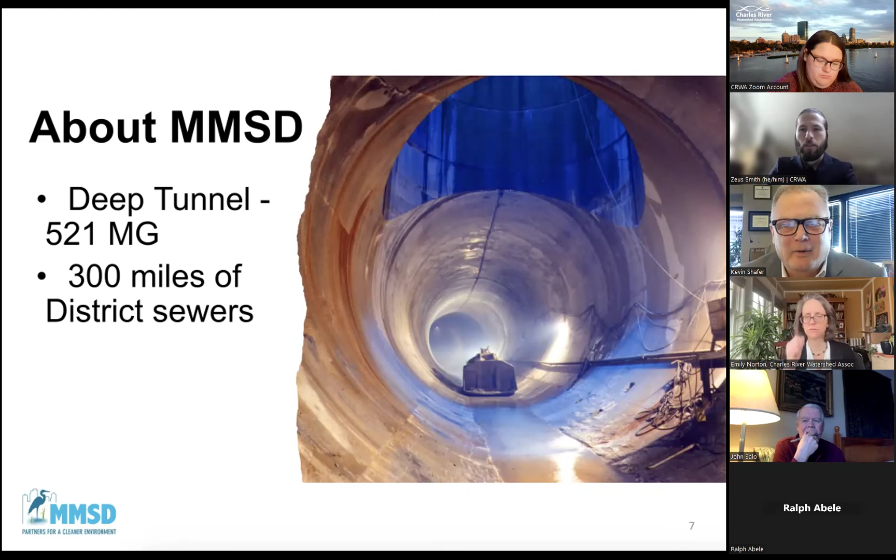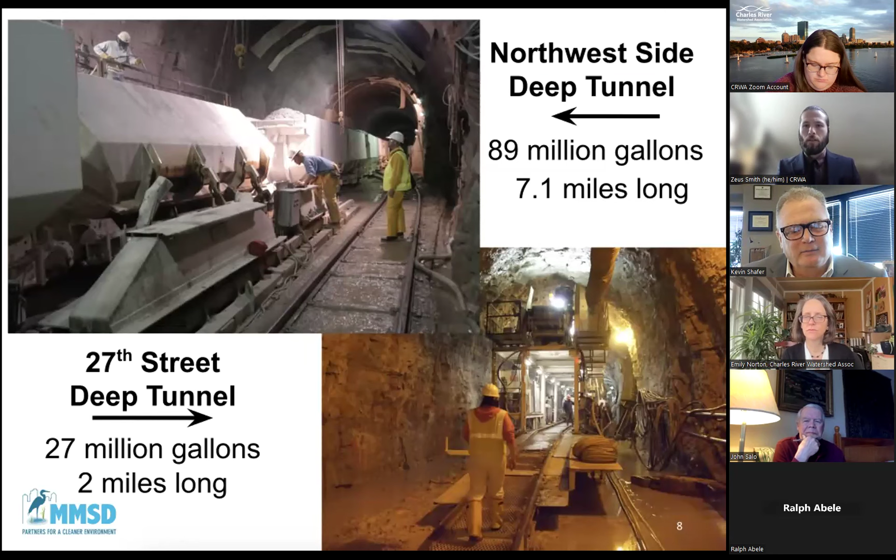Next slide. We've added 2 tunnels since I've been here. That's part of that 521. We put in the Northwest Side Tunnel, which was 89 million gallons, and 27th Street Tunnel, which is 27 million. And I show these pictures because this is not easy construction. This takes a long time to design, to construct, and safety of the workers and the public is high on the charts when we're trying to do this work. Next slide.

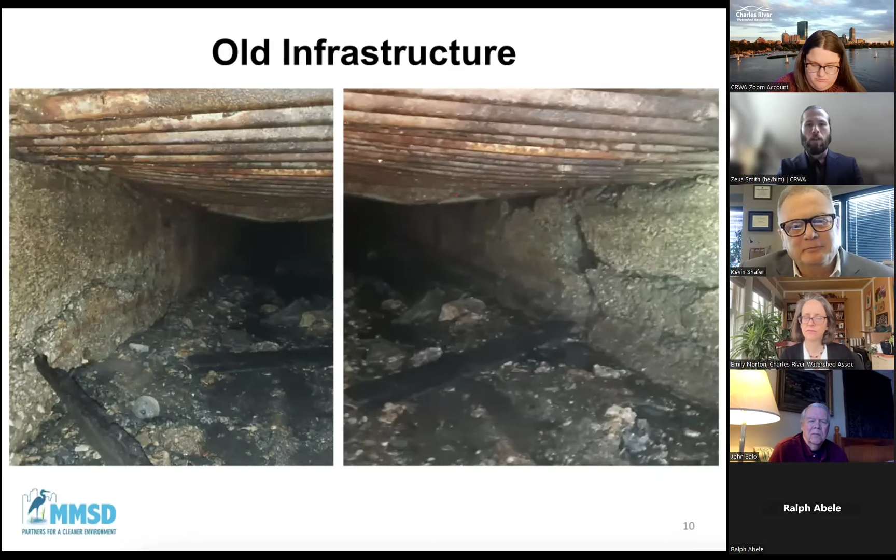And like Boston and everywhere else, we have infrastructure that's very old. This is a current project that we have. That pipe is still operational today. You would think it's going to fall in on itself, but luckily it has not. So we're in an emergency repair to the sewer to put a new pipe to replace this one. Next slide. I think I saw a chat question pop up.

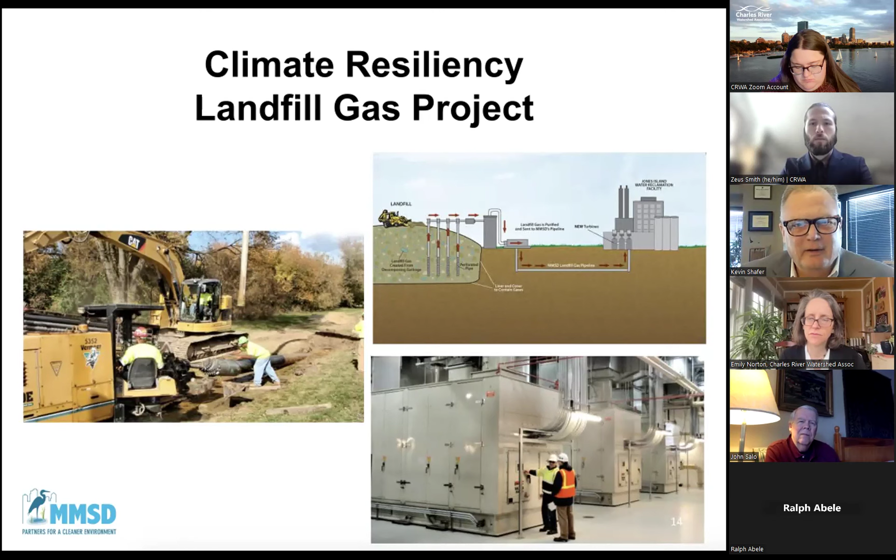Just a couple slides on the climate resilience energy side. We built a landfill gas pipeline in 2012. It went online in 2014. And so now when it's not raining, when we're not running the deep tunnel pumps, our Jones Island plant will run off of landfill gas as opposed to natural gas or coal produced electricity. So it's been a great project for us, and it's one of the big steps that we're using to get to that 80% self-produced goal. Next slide.

So when we look at the left side of the brain on that vision, it really is looking at a watershed approach. On this map, you can see the red line. That is my sewer service area. And as I said before, it changes constantly. But we're at the downstream end of the Milwaukee River watershed. We have the Milwaukee, which is the orange-yellow watershed.

The green is the Menomonee River watershed. The purple is the Kinnickinnic. The blue at the bottom is Oak Creek. And then the gray is Root River. So we're at the tail end or downstream end of the Milwaukee River. The Milwaukee River runs right through downtown Milwaukee, and we're the headwaters for the Root.

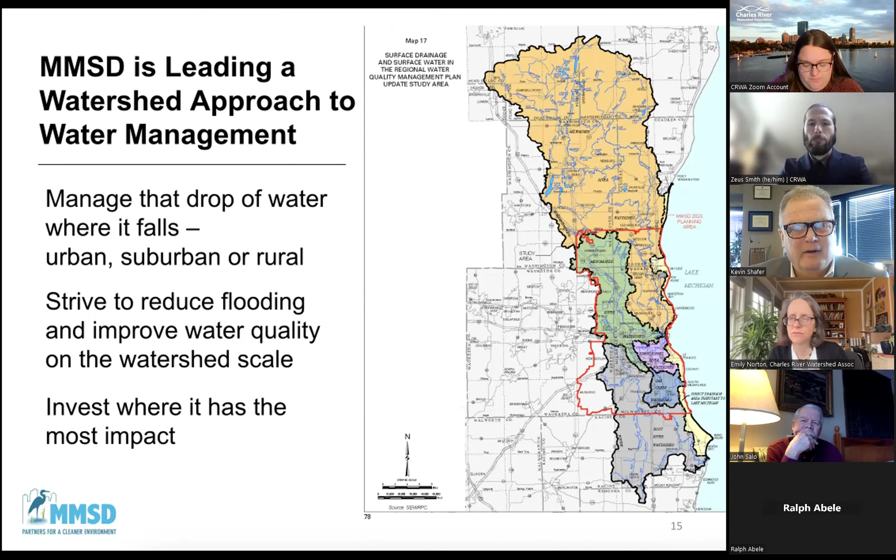So what we've really tried to do is to adopt an approach where we're managing water where it falls. And that's in the urban, suburban, and rural areas, which means we're working with farmers, we're working with communities in the urban setting, trying to manage stormwater so that it does not become floodwater, and trying to manage stormwater so that there's less pollutants running off into the waterways and keep that stormwater out of the combined sewer system as well. And we're looking to try to invest our dollars where it has the most impact. Next slide.

Same issue here. This is Hart Park. This is in Wauwatosa, one of the suburban areas, and this had about 75 homes on it. One of my first public meetings in 1998 was for this project, and at that time, people were flooding significantly throughout the area. We went in and purchased those homes. We lowered what we call lowered the floodplain.

So we lowered the area in the floodplain, and State Street, that road that you see across the top of that park area, is really just a raised area that is now a levee that people don't even know is a levee, to protect the homes and the businesses on the other side of that road, but allows this area to flood when it happens to get those large storms. We went in and we took out a lot of concrete lining, naturalized it as much as we could, and this picture on the bottom shows that waterway. Next slide.

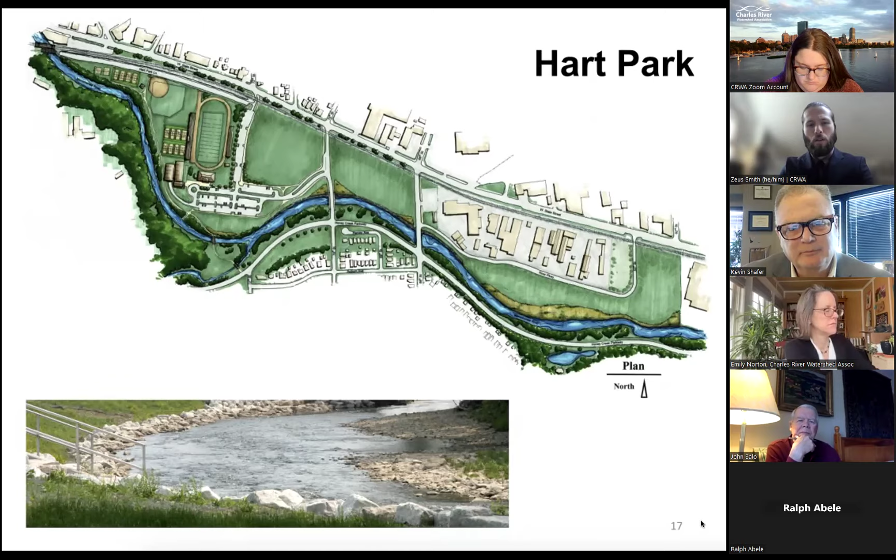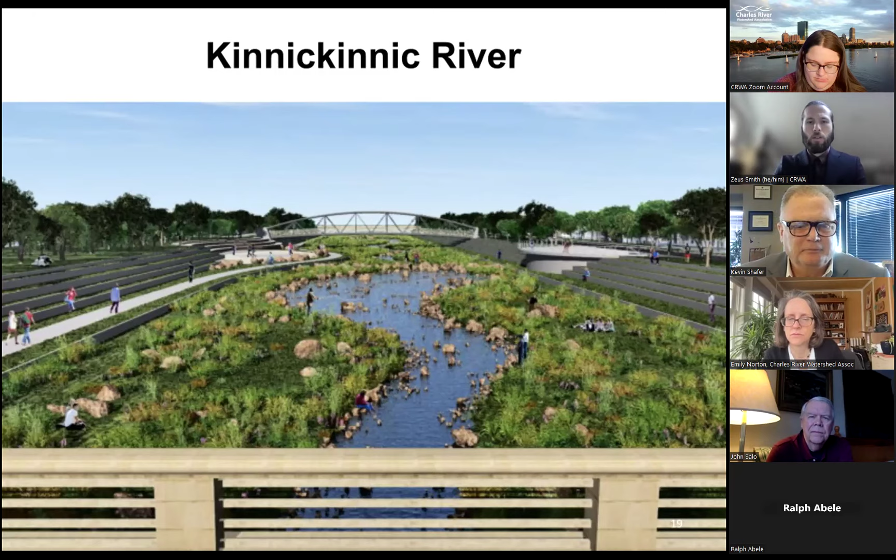But this is a 100-year flood protection project that returned to nature with the work that we did. And we're seeing fish spawning up through the waterway now that we didn't see before. Next slide.

So I'm kind of taking you through an evolution of how we started some of this stuff 25 years ago, which was building off the deep tunnel system, really manage those CSOs as much as we can. And as you were talking about earlier, Zeus, you said you've got the low-hanging fruit. Now you're really trying to get the next step. We were in that same place. And so we really relied on and improved the operation of the deep tunnel system to reduce CSOs.

Then we went into that flood management work that I just showed you pictures of, because if you can keep the water in the creek, it's not getting into people's basements, which then go into the floor drains, which are then connected to the sewer system, which then help us reduce overflows if we can keep that water out of those basements. Plus, it keeps the water out of people's basements. So we're kind of working upstream from the tunnel to the flood management projects.

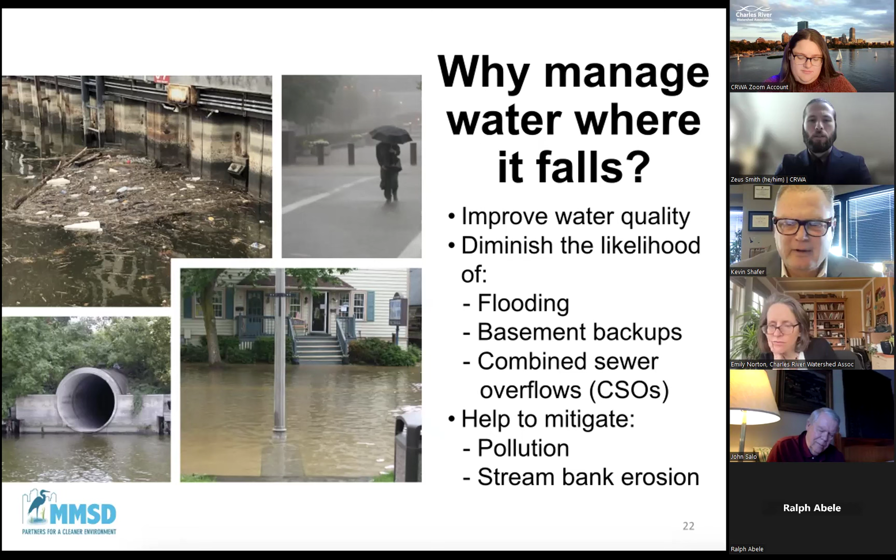So here's just some of the pictures. You know, flooding on the bottom right, that's probably around 2009, 2010. We get heavy rainstorms, trying to minimize flooding, basement backups, and CSOs. And also, I've not talked about it, but stream bank erosion as well. Next slide.

So we've got several programs that I'm going to go through that we have implemented and are implementing. We fund this every year through our capital improvement budget, our CIP, but we're trying to reduce the amount of wastewater that we have to clean, because if it's stormwater and we can allow it to be cleaned naturally and run off to the rivers, then we don't have to pass it through our wastewater treatment plants. We're trying to keep clear water out of the system.

We've got a private property inflow and infiltration program, which I don't have in this presentation, but working to reduce the inflow and infiltration that's coming into the laterals from the house to the street. That's about $5 million a year that we fund there. We have been in compliance with our permit practically since I've been here. In 25 years, I think we've only had 2 permit violations, and they were all garnered all this work towards the 2035 vision.

This picture is a suburbs of Fox Point, and this was a new development, and they came to us and we funded this green infrastructure around the facility to reduce the runoff and the impacts of this development. Next slide.

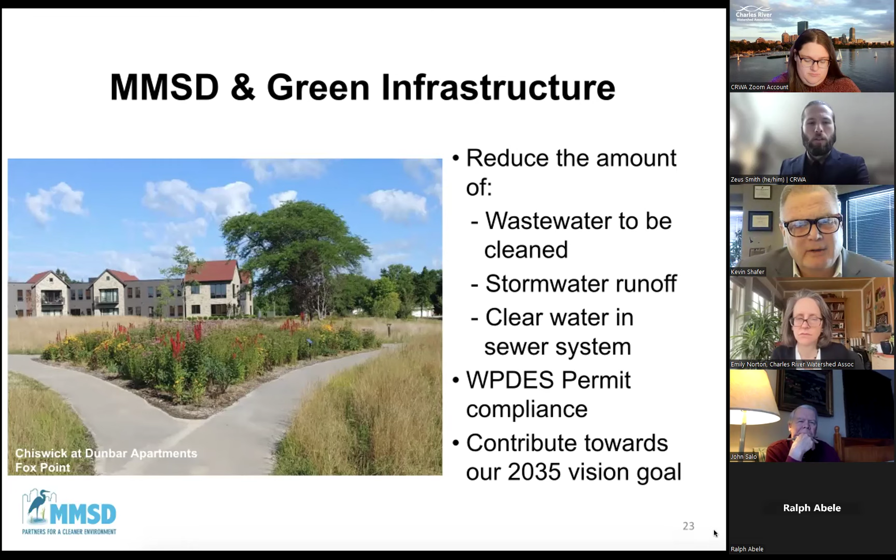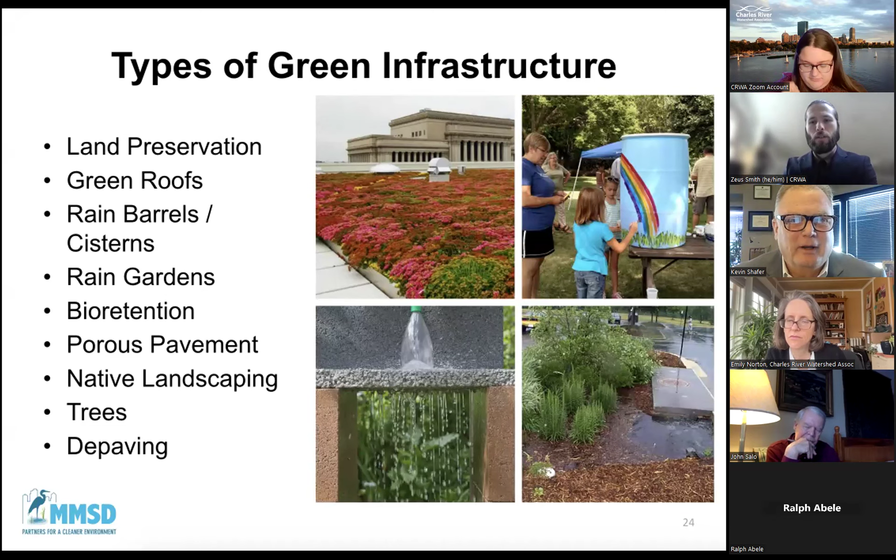We have different types of green infrastructure that we pay for: rain gardens, rain barrels, green roofs, bioswales, trees, depaving parking lots, and so forth. One of the most fulfilling projects we have is our Green Schools program, where we are taking asphalt that's not used very much. It was built mostly to lower maintenance, replacing that asphalt with natural areas for the students to play and learn in. And it's just really fulfilling to see a classroom of kids out there playing in an area that's also a stormwater management facility. Next slide.

Here's kind of the timeline. Like I said, I started in 1998, head of engineering. 2002, I became executive director. So we just started the Greenseams program, which I'll talk about in a minute. Then we came along with a best management practice partnership program. Then went to the regional green roof program, what we call the GIP, the Green Infrastructure Partnership Program, GIPP.

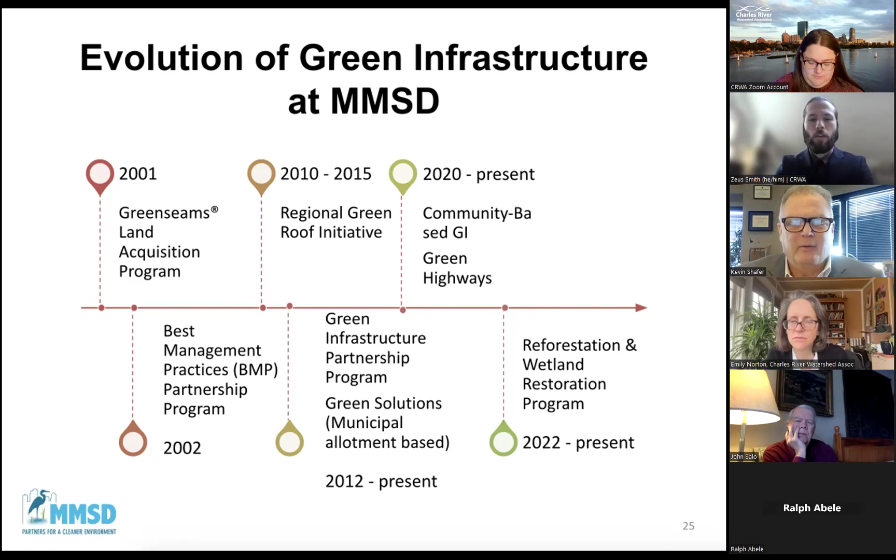And all of these projects or programs are still going now, up till most recently in 2022. When President Biden came in, I could see a strong emphasis coming on climate change. So we started a reforestation and wetland program, which I'll talk about in a minute. Next slide.

So this is the GIPP, the Green Infrastructure Partnership Program. This is basically a competitive grant program where we pay up to 50% of the green infrastructure cost. We try to keep those costs at about $1.95 per gallon. This can be on public or private land. We're really looking for developers and champions, people to really take this and move it forward on their own.

And once we get done, we put a conservation easement on that land, because we need to have some form of asset to show that the investment that we made with public dollars has an asset that's associated with it. Next slide.

We also do the Green Solutions program. This is a reimbursement program for the municipalities. When we started green infrastructure in 2001, 2002, the biggest naysayers were the city engineers, because there was no way to document a for sure improvement to water quality. And that was because we were only looking at stormwater management. We weren't looking at all the other benefits that are brought with it.

So we started a program where we reimbursed the municipalities to put green infrastructure into road projects, into redevelopments that they're managing. We put a 10-year easement on that. Minimum projects are $25,000. If they don't spend the money in 2 years, we roll that over as a $300,000 cap that we then distribute to other communities. So it really gives the municipality an incentive to use the funding as we bring it out.

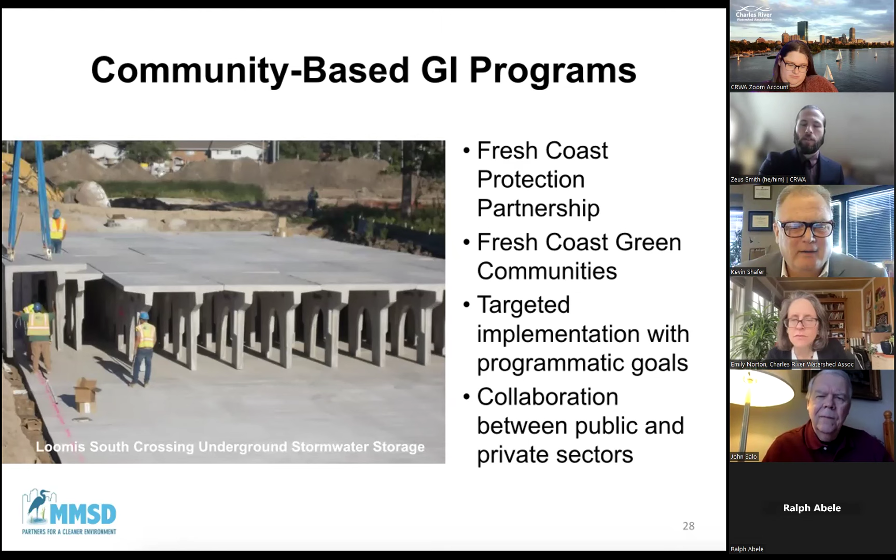The benefit of the public-private partnership is the nimble approach that they can take with moving these projects forward. Plus, we do not pay a dime on these projects until they're fully operational and they can prove that the number of gallons that they said they were going to get from the project actually materializes. So we do not have payments on these projects until the very end, which my CFO likes. It's a good cash flow for us and we can see it coming. But it really provides the incentive for them to get the projects done and to meet the specs that we had started with. Next slide.

This project started several years ago. This is a green highway project. I actually got this from Atlanta. So I went to some conference that we were at and was talking to someone and we were looking out at this interstate that had all these overpasses. And I said, well, that's a great collection system for water because they're sending it down these downspouts off the interstate and just going into the paved area and the combined sewer system.

So what we did was we partnered with the city of Milwaukee, Milwaukee County, and especially the DOT, the Department of Transportation for the state, has been a great partner on this. And we design, construct, and manage these projects to take the water off those overpasses and put them into a natural setting. This picture is the Marquette overpass. And after we built it, the State Department of Natural Resources actually moved their offices across the street, which is a nice synergy because they help us maintain this once it's built.

And we're on our third overpass now. We just approved the third one last month. So we're systematically going into some of these overpass areas in the urban area and trying to naturalize the setting underneath. Next slide.

This is the Greenseams program. So this is really up in the upper areas of the watershed on that map that I showed you. Again, looking at the watershed approach as a whole. This project was started when I was head of engineering in 2001. And what we thought was, with our flood management, we're always kind of the hamster in the wheel. We're always chasing the water and never getting ahead of it. And that's because as soon as we built a flood management facility, someone would put a development upstream that would send more water down to that facility.

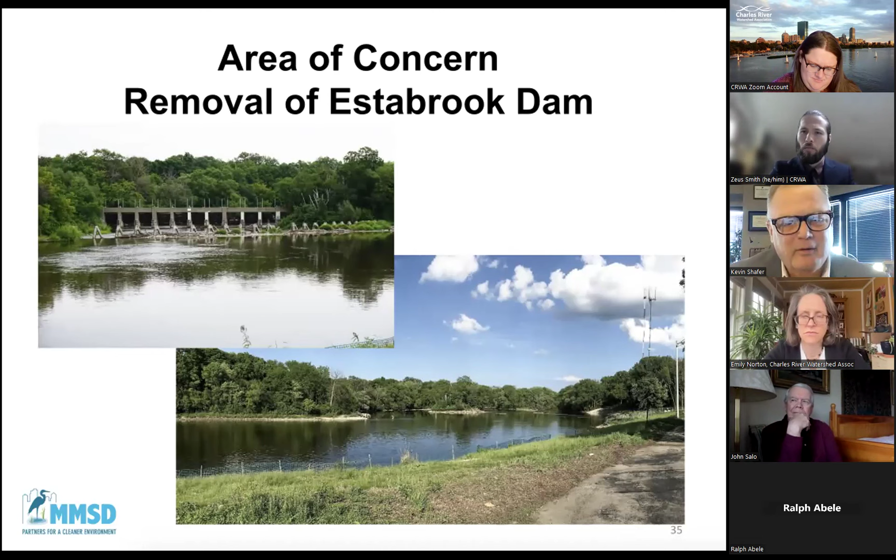The county sold us the dam for $1, and we tore the dam out. This is just after deconstruction of the dam, the bottom right picture. We removed the dam, restored the waterway to its natural setting, reduced the flooding impacts upstream that dam was causing, and ended up recouping all of our funding through both state and federal programs. So it's been a win-win for the community. Next slide.

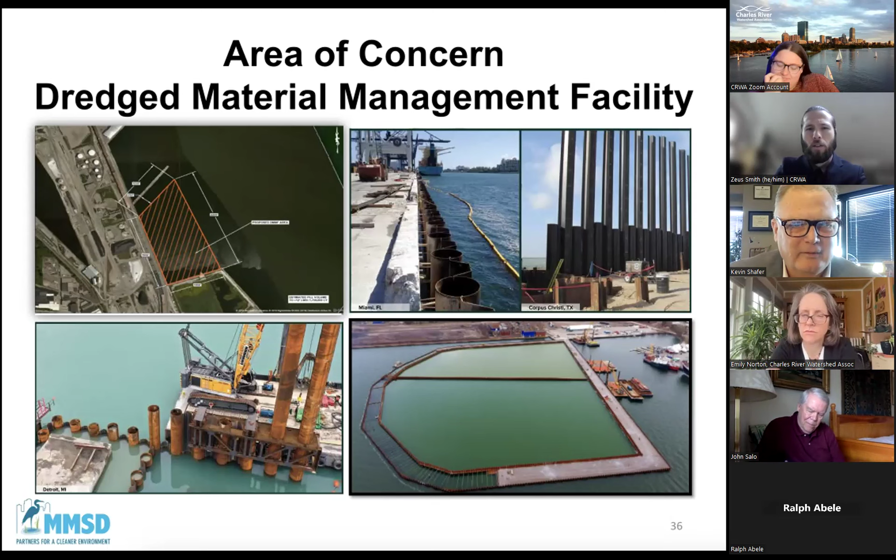But this just shows that as we've kind of matured as a sewer district and as a region, we've gone from CSOs to flood management to green infrastructure, and now they're asking us to take part in projects that weren't originally in our jurisdiction. So we had to get some help from the state legislature to change our jurisdictional limits. Next slide.

This is the Kletzsch Dam Fish Passage that we built last year, went online in December of 2023. And this is another area of concern project where EPA paid us to do the work. We actually built a fish passage around a low head dam that was in the area that the community wanted to keep. So this is now operational, and one of those where we kind of stepped out again and did more than what we have in our jurisdictional limits. Next slide.

A lot of community involvement. We've captured the One Water, Our Water theme. We go out to communities and talk about what they can do, individuals, neighborhoods, what they can do to reduce the runoff or the use of water in their homes. A lot of it is really starting to be more towards jobs because there's a large contingent of folks that would really benefit from some of the good paying jobs, either the climate change initiatives that we have or with operators of treatment plants. We're really trying to connect those career pathways through this public engagement as well. Next slide.